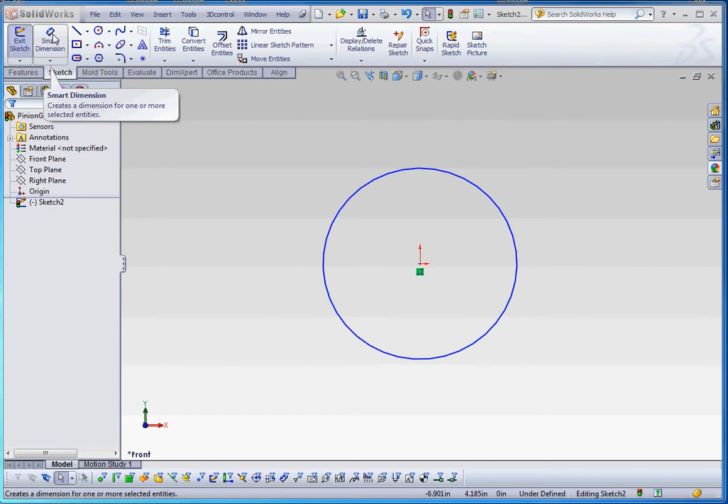I'm going to do my root diameter. My root diameter is going to be 0.6875. That's already been determined from the formulas I put together. So we're going to 0.6875. Again, this is a really small gear, so I'm going to go ahead and scoot in on this. You probably want to do this right away instead of doing 3 circles right away. Start with your root diameter. Get a certain perspective on this as you go through it.

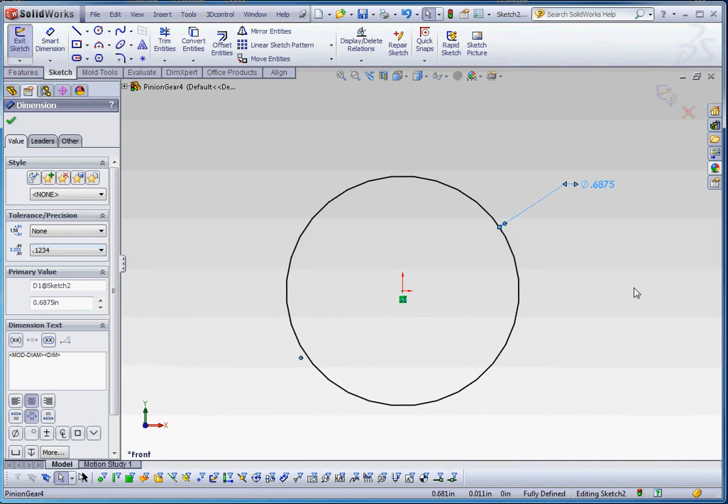And let's make sure we go up to 4 significant digits. So we could do that instead of changing these things individually. Let's go to our document properties and go to units, and we're going to keep inch pound second, but for every dimension we put in there, let's go ahead and make sure that it goes up to 4 significant digits. Okay, that's our root diameter.

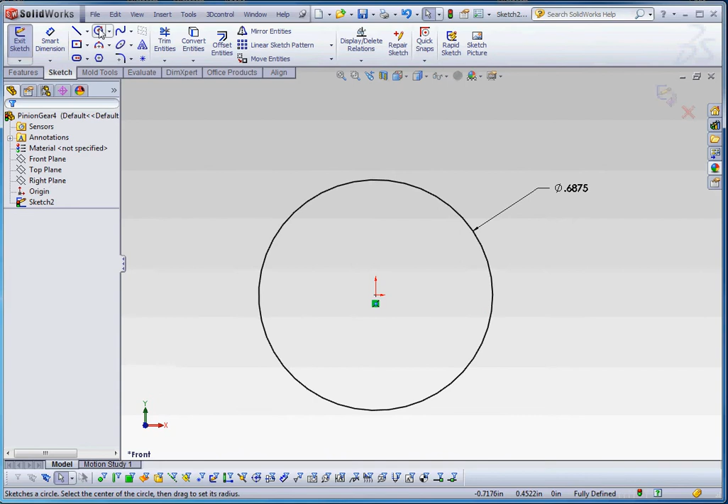This is going to be the base of our tooth. This is going to be the base of our gear, and we're going to build the teeth on top of that. So the next circles are going to be just a little bit higher. So remember the second one's going to be your pitch diameter, and the one on top is going to be the outside diameter. Let's turn those into construction lines and go ahead and dimension these.

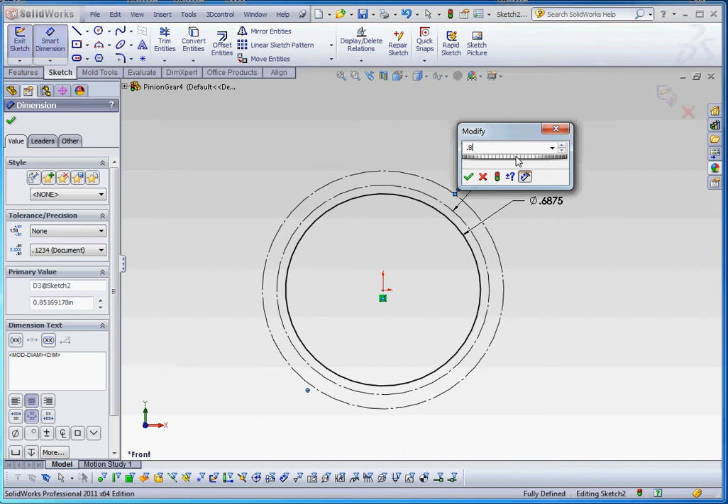So my pitch diameter is going to be 0.750. Then my outside diameter is going to be 0.8135. I'm sorry, 0.8125. There we go. Those are the 3. Next line. Let's do a vertical line from the origin up. Arbitrary distance. It doesn't really make a difference.

And if you look at page number 2, we'll go through our document here that I put together, so you can see how this thing goes together. And I'll scroll through this too as I go through the film. So right now we're going to be in page 2. So we've already drawn our root diameter, our pitch diameter, and our outside diameter.

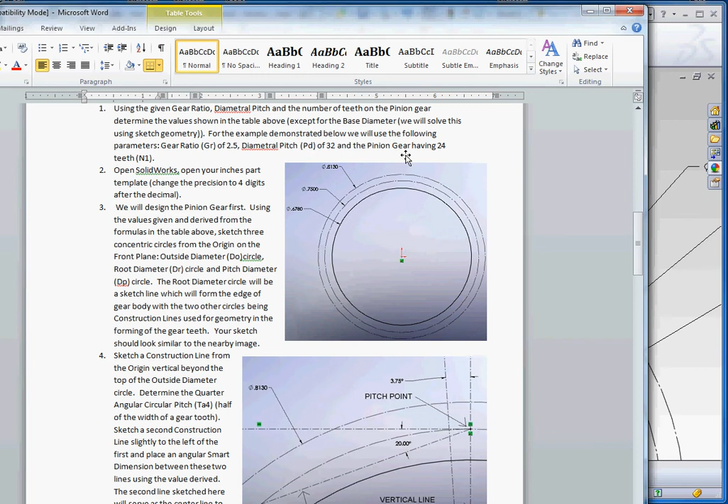And you notice that I kind of rounded things out a little bit here. I would suggest that we still stick with 4 significant digits. And I'll kind of go over making corrections to that if we need to do that a little bit later. I think the only corrections we're going to need to make is for our center to center distance on our base feature when we get into the assembly and put our gears together.

So what we're going to be doing next is we're going to draw, we've already drawn this vertical line. We're going to draw our quarter angular circular pitch here, which is going to be our mirror line. We're going to draw that thing out. We're going to draw in a pressure line, which is going to be at 20 degrees, after we draw in a horizontal line here at that pitch point, which is going to be the intersection of our pitch diameter and this vertical line here.

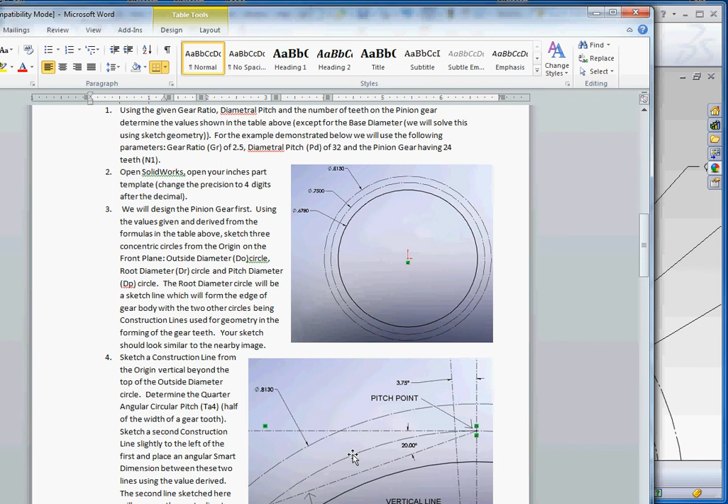And from there we're going to draw some additional circles in order to get to the point where we have enough geometry in here that we can start drawing the profile of our teeth. So, center line. Draw this out, vertical. That defines where the pitch point is going to be. Let's draw in our quarter angular pitch, our mirror line for our tooth profile, which we're going to use later, minus 3.75 degrees.

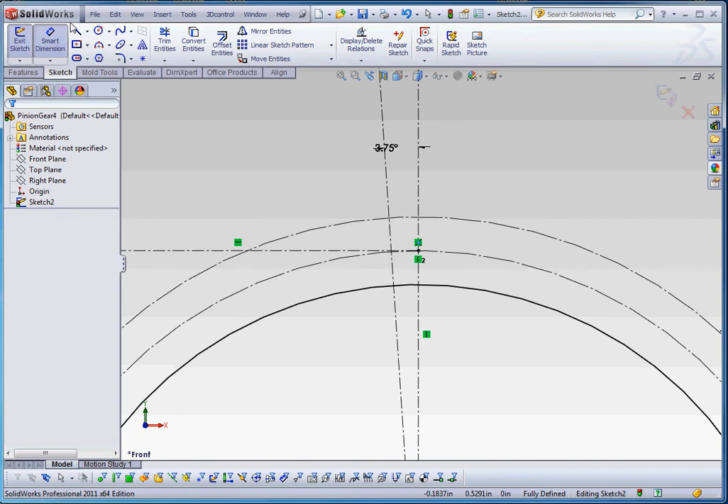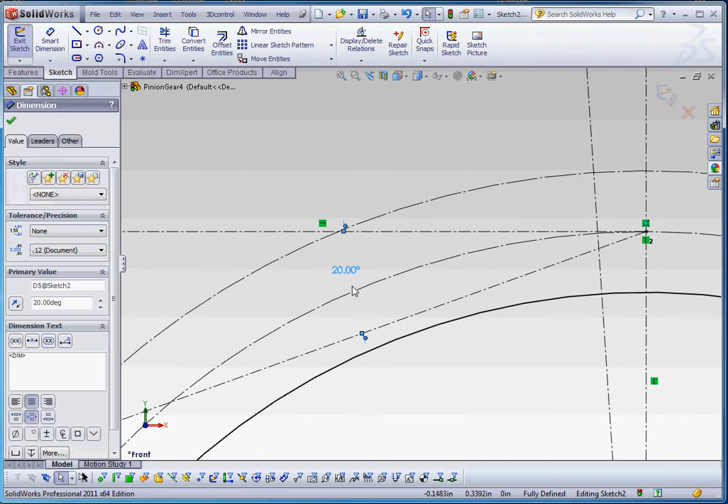Type that in there. Let's put in our pressure line. The pressure value that we're going to be using for this gear tooth assignment is going to be 20 degrees, and that's standard. There are some other values that can be used too. I think 14.5 is a value that you sometimes see, relatively common, but certainly not as common as a 20 degree value. That is the standard used today typically. And then once we do that, you notice that we are now off of page 2 and going on to page 3.

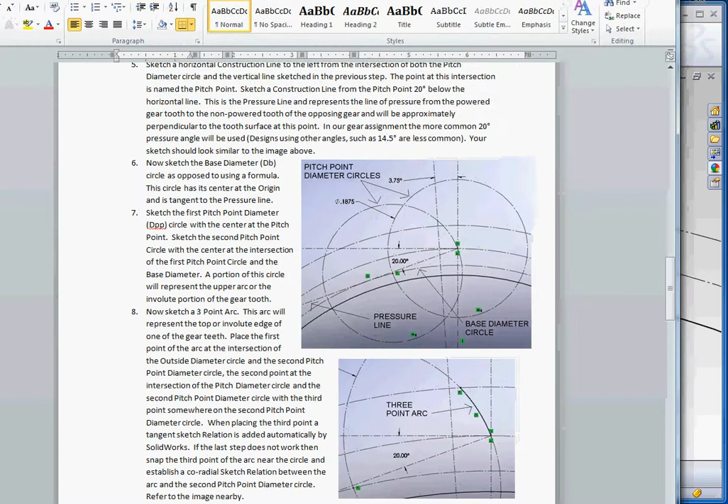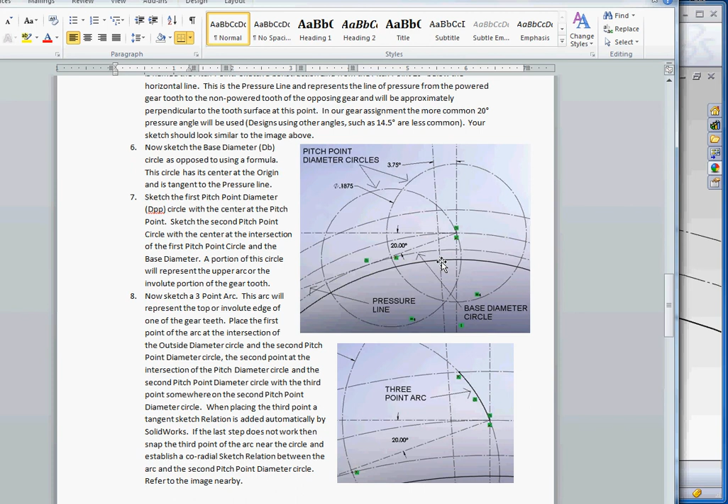What we're going to be drawing next are pitch point diameter circles. The first one's going to be on the right at the pitch point, and then the second one is going to be at the intersection of this circle and our base diameter. So now we've drawn out our pressure line, we need to put in our base diameter. That base diameter is not determined through an algebraic function, but we're going to determine that through sketch geometry. So we're going to draw a circle from the center of our gear and make that tangent to our pressure line. So let's go ahead and do that next.

Circle, draw this out, make that tangent to our pressure line. Let's turn that into construction geometry. And let's draw in our two pitch point circles. Let's go ahead and change that into construction geometry. And the values for my pitch point circles are 0.1875.

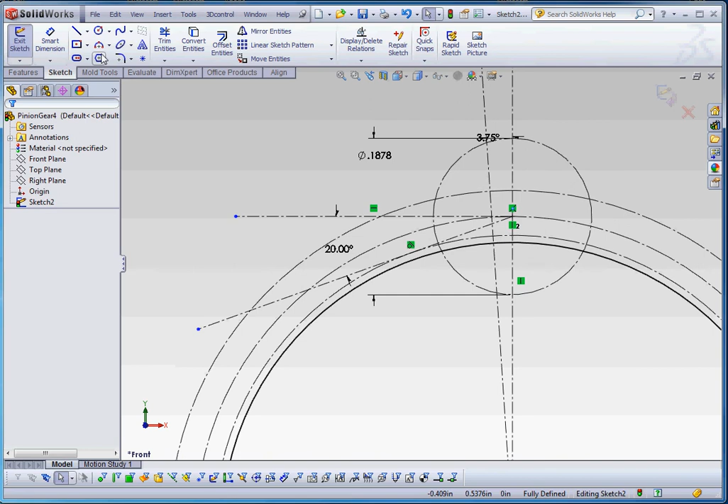Now let's draw in a second circle. This circle is going to be at the intersection of our base diameter and the first pitch point circle. And what this is going to allow us to do, finally, is to give us the profile of our tooth, begin to give us the top profile of that tooth. So let's turn this into construction geometry, or a construction line, a center line. It's not really a center line, but it's a construction line. Let's make these two circles equal to each other.

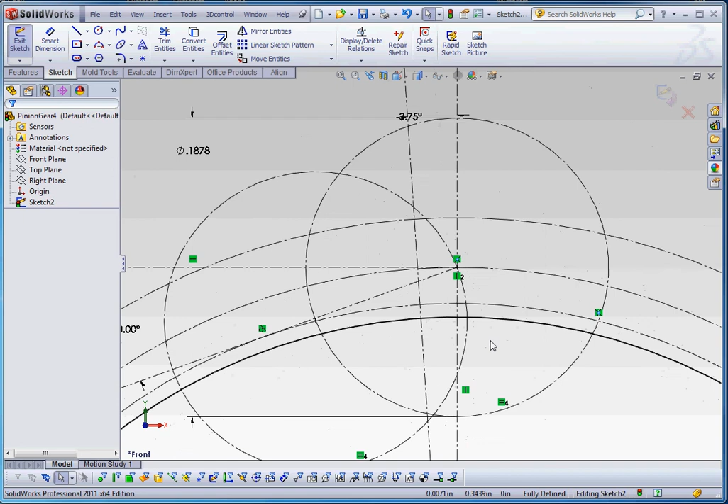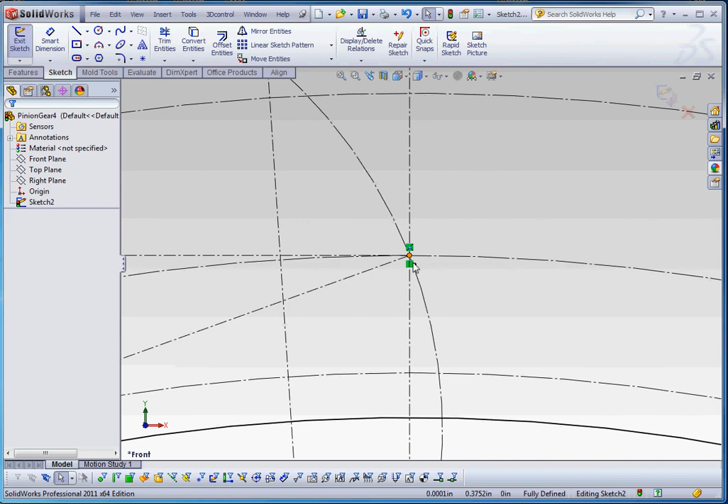And now we're going to be able to draw in the first element of our tooth. And this is going to be an arc, from a point down here to our pitch point. This point up here represents the very top of the tooth. This is going to be the pitch point, so this is going to be one of the profiles of our teeth. And on the bottom of our tooth down here, we're going to do a tangent arc from that point down to our root diameter. And I'll show you how to do that in our next film.